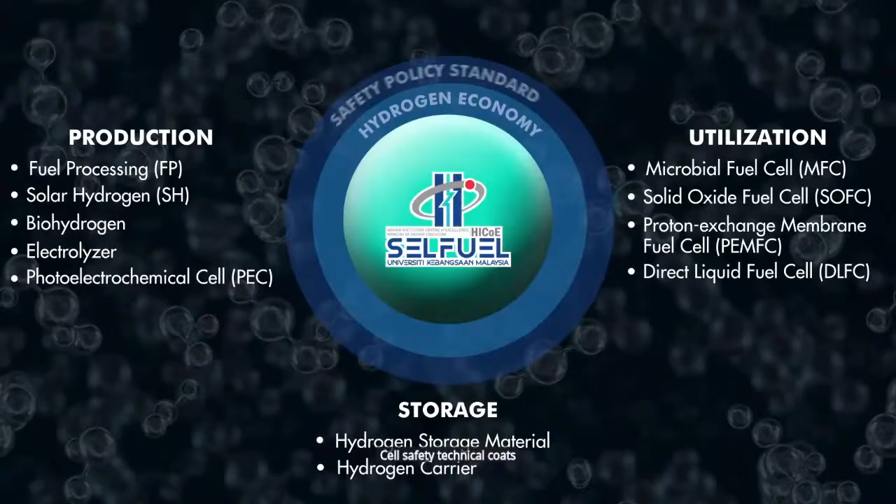Driving innovation and pushing the boundaries of fuel cell and hydrogen technology. Groundbreaking collaborations with esteemed industry partners. Obtain more than 50 million ringgit in research grants.

Our institute proudly offers three programs: research-oriented Master of Science, Doctoral of Philosophy programs, Master of Science in Low Carbon and Hydrogen Technology, and Micro-Credential. Our alumni are a diverse group of individuals who cover the globe, leading education, reshaping industry landscape toward a model of self-leadership, creativity, and innovation.

As a leading institution in fuel cell and hydrogen research, we have forged strong collaborations with top-tier universities across the globe. Through these collaborations, our students and researchers gain valuable international exposure, enhancing their academic and professional growth while contributing to the global scientific community. Join us at SELFUEL and embark on a transformative educational journey that will empower you to excel and make a lasting impact on our sustainable world.

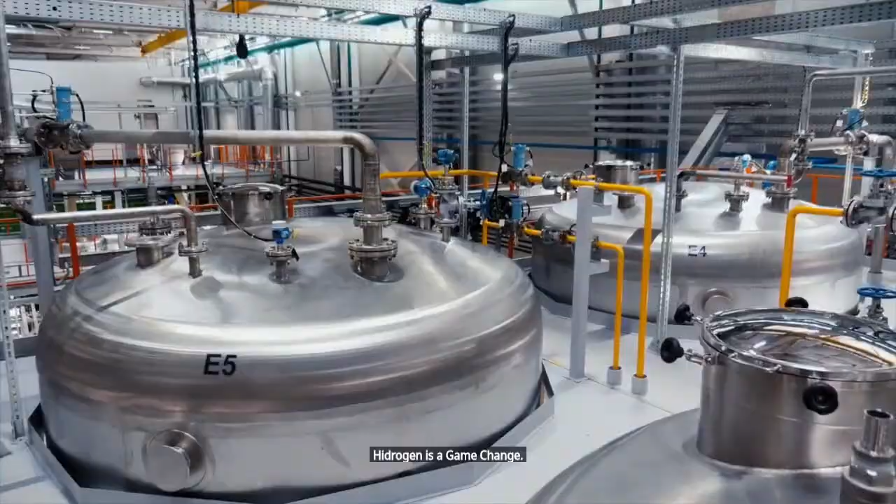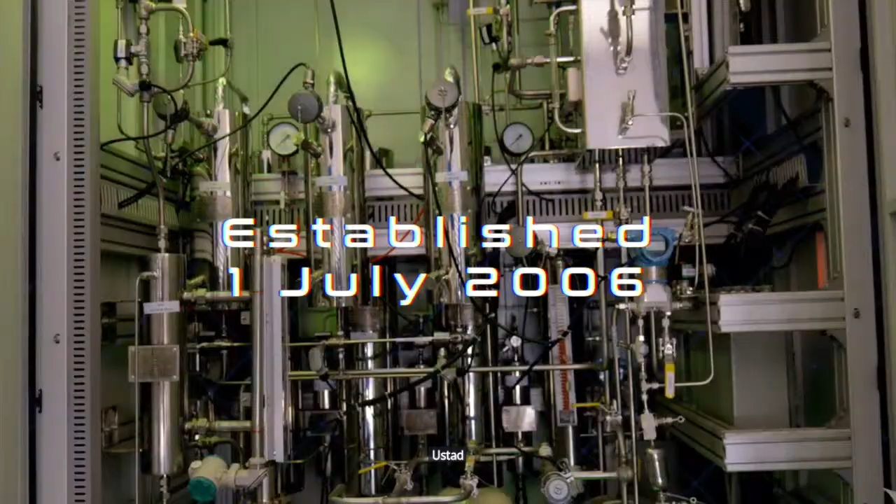But how? Hydrogen is a game changer. And at the forefront of Malaysia's hydrogen revolution stands the Fuel Cell Institute of Universiti Kebangsaan Malaysia. The Fuel Cell Institute, also known as SELFUEL, is a premier national research centre at UKM. Established on July 1st, 2006, our goal is to become a centre of excellence for fuel cell and hydrogen technology around the world.

Consistent with government goals of expanding opportunities for clean energy sources, the shift from a carbon economy to a hydrogen economy holds the key to a brighter, cleaner future for all.

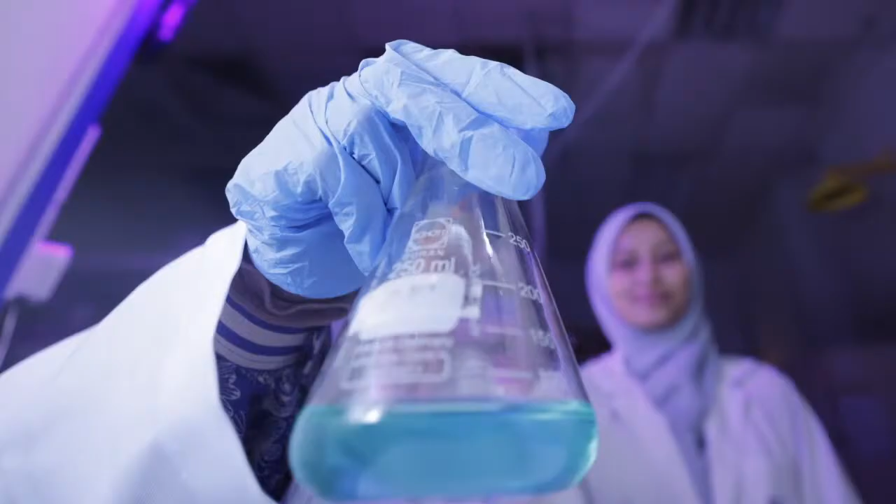At SELFUEL, our research covers the entire hydrogen economy value chain. We delve into diverse areas ranging from hydrogen production, utilizing solar and renewable electricity, sustainable hydrocarbon thermal chemical processes, and biological hydrogen production through fermentation and microbial electrolysis cells.

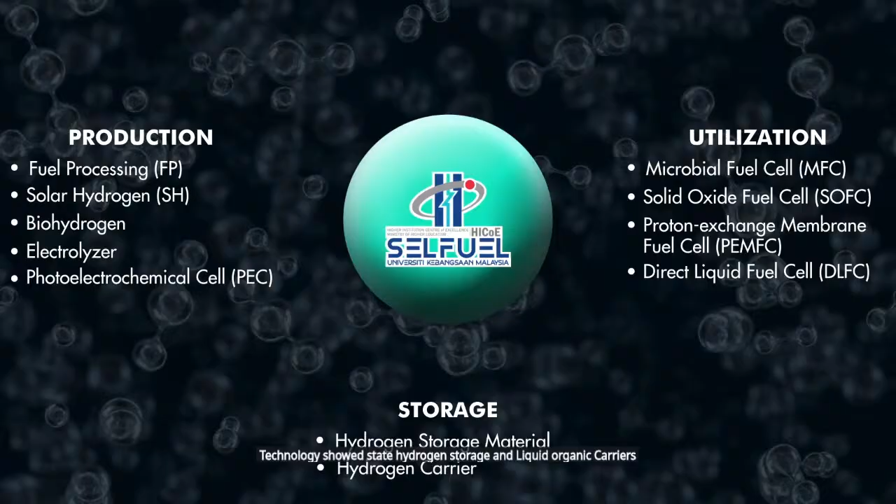Our research also encompasses the utilization of hydrogen in various fuel cell types, including proton exchange membrane fuel cells, solid oxide fuel cells, direct liquid fuel cells, and microbial fuel cells. We explore advanced technologies in solid-state hydrogen storage and liquid organic hydrogen carriers. Safety considerations and the development of hydrogen and fuel cell safety technical codes are also integral parts of our work.

Driving innovation and pushing the boundaries of fuel cell and hydrogen technology. Groundbreaking collaborations with esteemed industry partners. Obtain more than 50 million ringgit in research grants.

Our institute proudly offers three programs: research-oriented Master of Science, Doctoral of Philosophy programs, Master of Science in Low Carbon and Hydrogen Technology, and Micro-Credential. Our alumni are a diverse group of individuals who cover the globe, leading education, reshaping industry landscape toward a model of self-leadership, creativity, and innovation.

As a leading institution in fuel cell and hydrogen research, we have forged strong collaborations with top-tier universities across the globe. Through these collaborations, our students and researchers gain valuable international exposure, enhancing their academic and professional growth while contributing to the global scientific community.

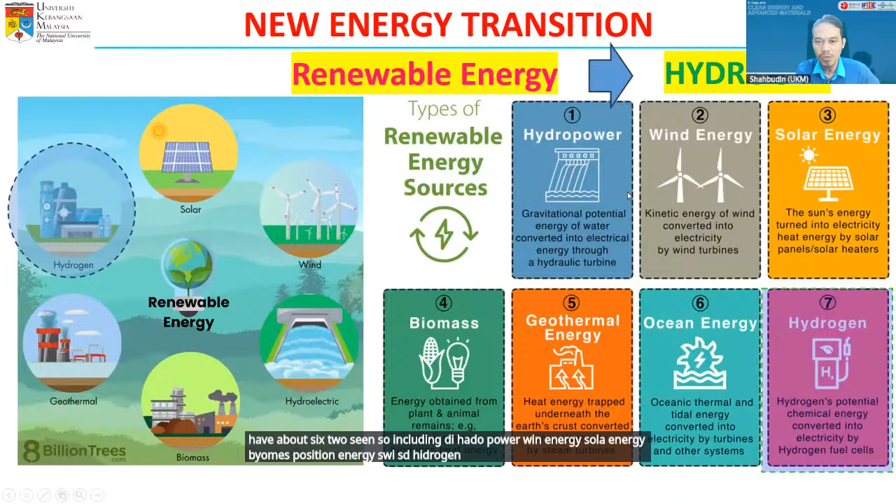So basically in renewable energy, we have about 6 to 7 categories, including hydropower, wind energy, solar energy, biomass, geothermal, ocean energy, as well as hydrogen energy. Hydrogen is one of the renewable energy resources.

Then why hydrogen? When we look into the characteristics, there is a lot of excellence, including that hydrogen is the simplest element on Earth, and the abundance is very huge, about 70% of the mass in the universe, and in terms of energy density it is quite high.

And when we apply hydrogen to energy, for example using the fuel cell as a power generation unit, we can have only water as a byproduct, and also thermal energy. So this is the benefit of hydrogen for energy.

For example, it can have quick refueling times, environmental benefits, long-term vehicle operating cost benefits, and also economic benefits, and the efficiency will be high compared to the internal combustion engine.

And when we look into the applications, hydrogen has potential in terms of energy, infrastructure, storage, and resilience. And when you see the applications, we can apply it into transportation and also industrial uses.

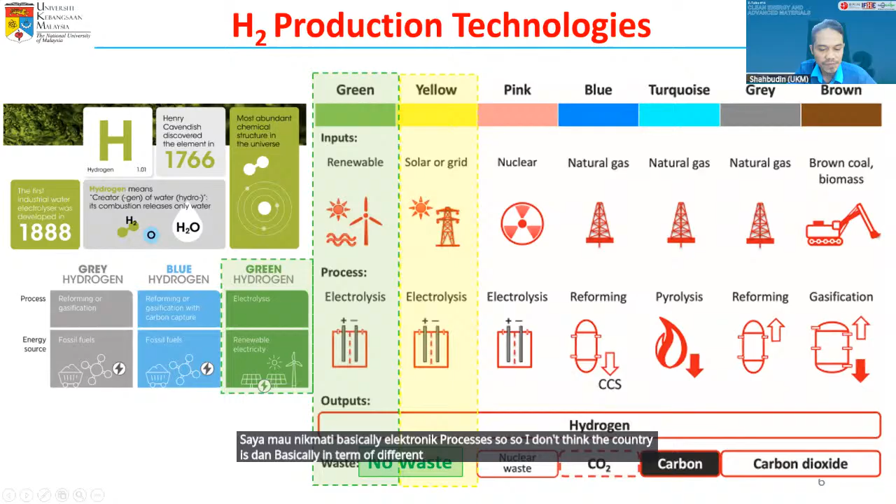But looking at these colors, basically we can say that if we consider green hydrogen production, in terms of waste there will be no waste, and in terms of technology it refers towards electrolysis processes. So whether the color code is yellow or green, in terms of environment it is very environmentally friendly because there is no waste.

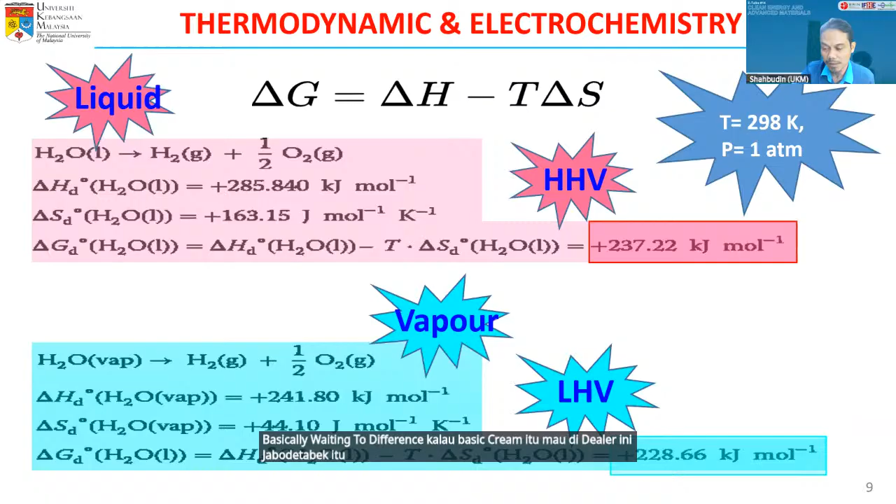While in vapor phase, this is referring to solid oxide fuel cells. The energy value here is 228 kilojoules per mole, which is referring to the low heating value.

In terms of performance, we are referring to the polarization curve. This is an indicator to know the performance of the electrolyzer. By looking at this polarization curve, we can know exactly, or roughly, what is the efficiency for each electrolyzer unit.

For example, if we look at the HHV, high heating value, the power to produce 1 kilogram of hydrogen is about 39.4 kilowatt hours. While referring to the low heating value, the amount of energy required to produce 1 kilogram of hydrogen is about 33.3 kilowatt hours.

This is basically referring to the amount of voltage for a single cell of the electrolyzer. For example, if we refer to the HHV, the voltage is about 1.48 volts for one cell, while for the LHV, the voltage would be about 1.23 volts.

By referring to the thermodynamics, we can realize the correlation between the current and the hydrogen production. If we need high hydrogen production, we need to put in a very high current, and it will affect the design.

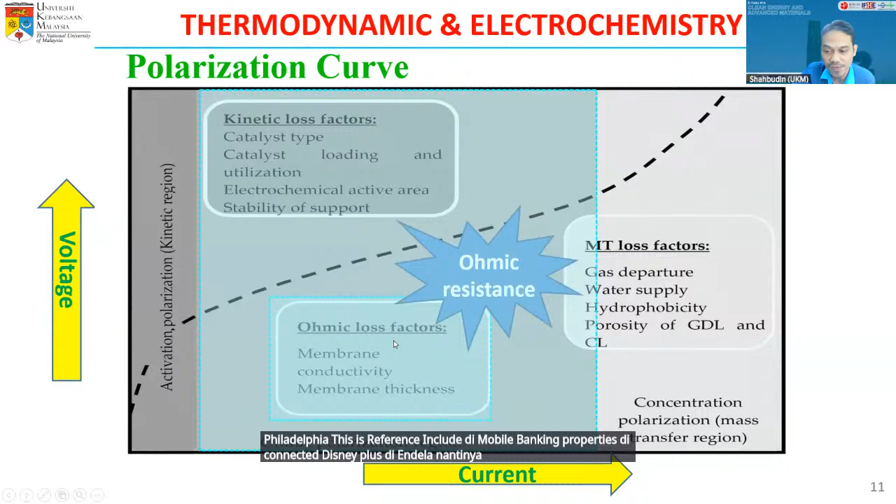We also have another type of loss referring to mass transport, including gas departure, water supply, hydrophobicity, and the porosity of the GDLs and catalyst layer. This is due to concentration polarization, because sometimes water cannot directly transfer to the electrode due to issues with gas bubble management at the anode side.

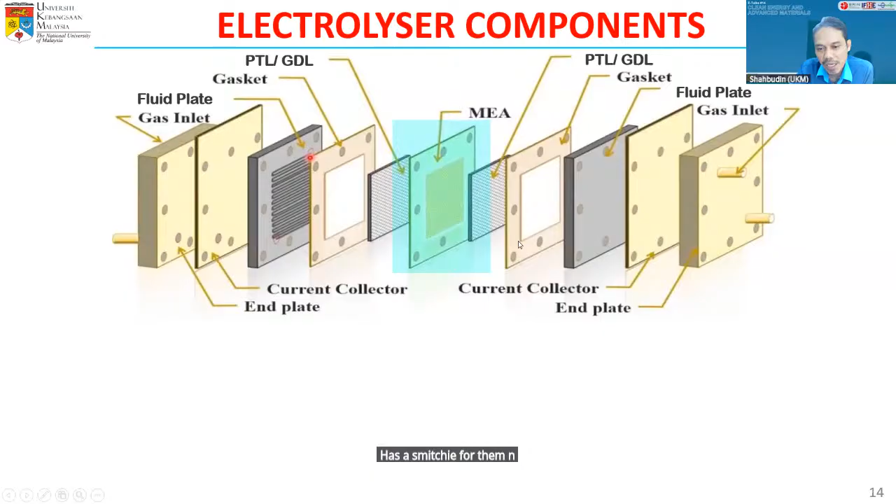This is the basic component for the electrolyzer. We have the fluid plate, for example referring to the bipolar plate. We have the gasket, the porous transport layer or gas diffusion layer, and the electrode, which we call the membrane electrode assembly. These components have a symmetry, for example the anode and cathode are similar components, and the MEA is the heart of the electrolyzer.

At the anode side, for the PEM type electrolyzer, we use iridium oxides. For the cathode side, we use platinum carbon, and for the membrane, the common material used is perfluorosulfonic acid, PFSA polymer membrane. This is the common material for the PEM electrolyzer.

Also, one of the important components we need to know is the bipolar plate, or the fluid distributor, which is the most important component and makes up more than 70% of the total weight.

The functions of this bipolar plate are to distribute the fluid, either in gas form, for example oxygen and hydrogen, and also the water, for example for the PEM electrolyzer. It also has a function to separate the cell, support the electrode, the MEA, and to facilitate the electrical distribution and thermal conductivity.

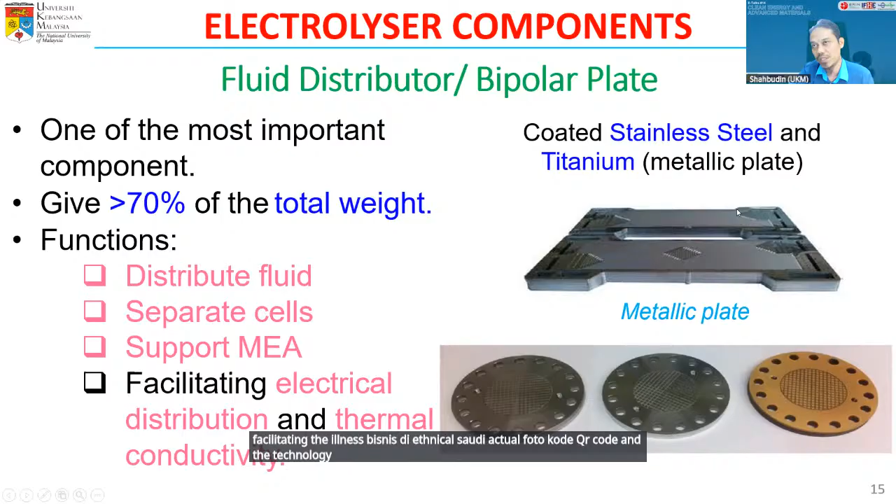This is an example of an actual photo for the coated stainless steel and titanium, which we refer to as the metallic plate for the electrolyzer.

The aim is to have a uniform gas distribution, good water transport, and good mass transfer. This is the goal when designing this bipolar plate.

In terms of the electrolyzer, we need to apply a high current. With high current, the tendency to corrode is very high. That's why the bipolar plate needs to be coated using a different material. The most common material used for the coating is platinum.

This is the target by the US DOE for the bipolar plate, in terms of the coating properties we need to have for the electrolyzer.

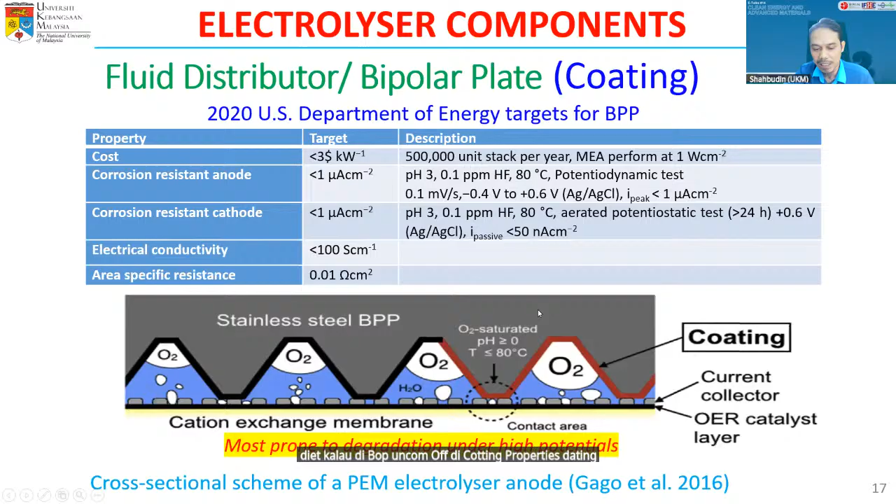After knowing the components, we can assemble the single cells, either referring to the alkaline electrolyzer or the PEM electrolyzer unit. After that, we can assemble all the cells, integrating them into complete stacks. We call it stacks for the multiple cells.

Then we move to the balance of plant. This is the system from NEL company, one of the hydrogen companies, for the electrolyzer system. For the balance of plant, or the system of the electrolyzer, this is a comparison between the alkaline and the PEM electrolyzer.

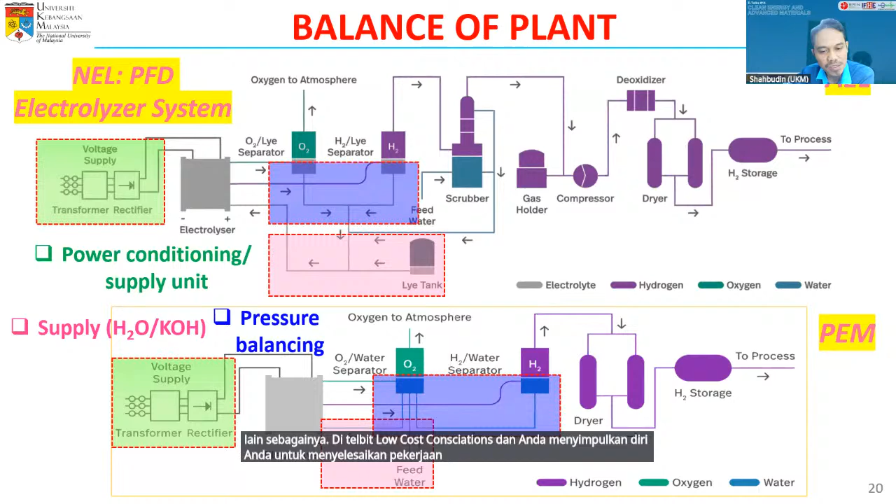We need to have the power conditioning, or the power supply unit, and then we need the reactant - in this case, DI water for the PEM electrolyzer and KOH for the alkaline, or even for the anion exchange membrane we have a lower concentration, for example 1 molar for the AEM. Then we need pressure balancing, because we need to properly manage the pressure at the anode and cathode side, since pressure builds up at the cathode side and we need to balance the system.

We also need to have the hydrogen cleanup system or subsystem. For example, for the alkaline part, some oxygen will penetrate the porous membrane, so there is some oxygen at the hydrogen side, and then before use we need the dryer. For the PEM electrolyzer, basically there is no oxygen permeated or transported from the anode to the cathode, so we can have hydrogen as a gas along with some small amount of water on the side.

And then of course, the last part is we should have the hydrogen storage.

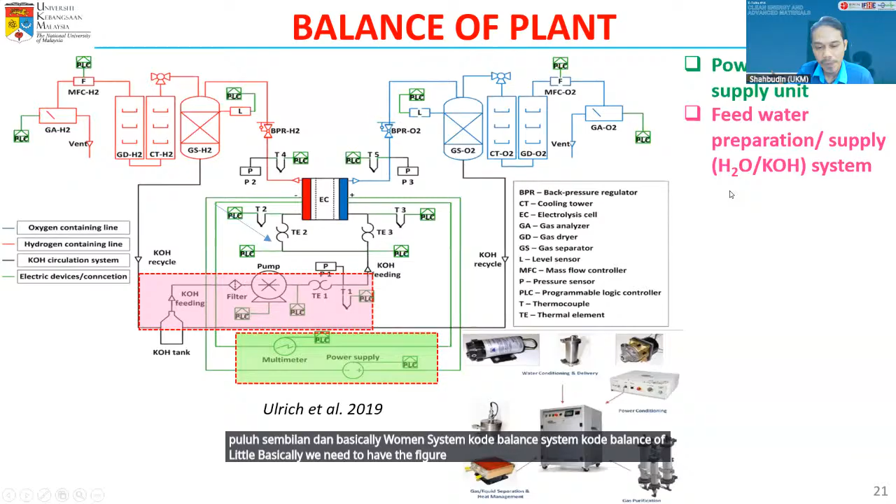When we look at the overall system for the balance of plant for the electrolyzer, we need the power conditioning, feed water preparation using pumps and so on, and the pressure balancing system as mentioned before. We also need the hydrogen cleanup system to remove water and oxygen, for example at the cathode side, plus hydrogen storage or buffer tank units. We also need the thermal management system, because when operating at very high temperature there is a requirement for cooling, using chillers or radiators. Finally, we need an overall control system to properly manage and link all the control systems for each subunit.

So this shows the importance of the BOP, and these are figures and actual photos for the Cummins products, previously known as Hydrogenics products.

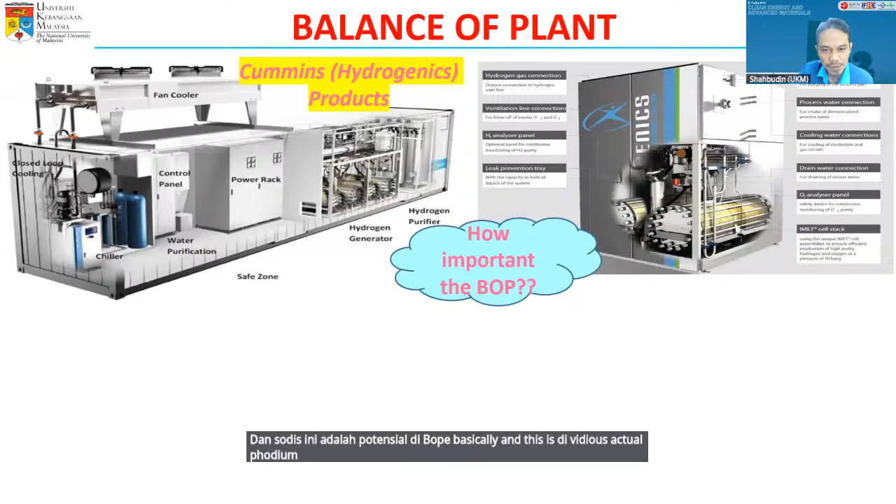This is again a comparison for the low temperature electrolyzers - the alkaline electrolyzer and the PEM electrolyzer. The important point is that based on the system, or based on the BOP, we can manage to have high purity, for example using a proper purification unit, so we can achieve very high purity hydrogen. For this case, the hydrogen can be purified up to nearly 99.998%. This shows the importance of the BOP.

If we don't properly manage or design the purification unit system, the purity can be affected. Also, in terms of operating conditions, for example how the system will be operated, we need to manage a proper configuration to make sure operations can run at, for example, 30 bar for the PEM electrolyzer, and for the alkaline, for example, 10 bar. This basically refers to how you manage or configure the system.

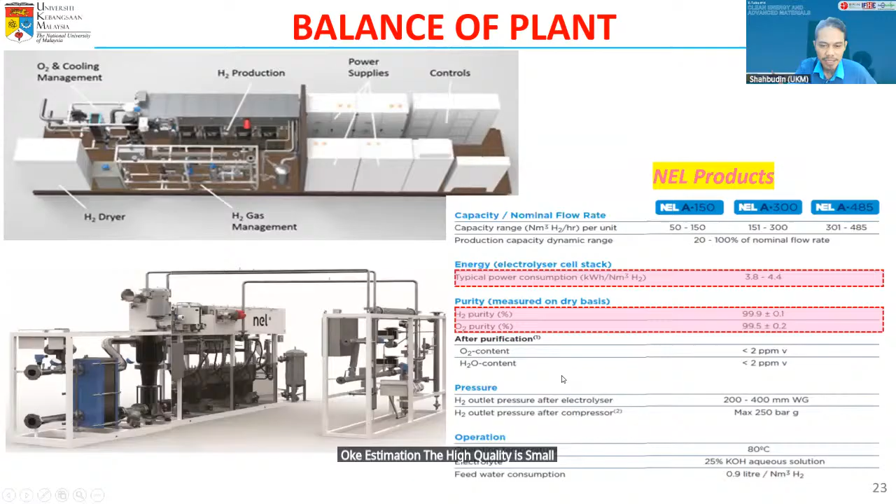As I mentioned, the purity is smaller than the previous one. And then this is the correlations. Once we have the materials, we have the designs for the stacks, and then we can integrate.

And this is the operating conditions, which will affect the performance. For example, the flow rates, the current supply, the energy supply that you need to provide, the solution concentration, for example the alkaline solutions. Basically for alkaline, about 30% concentration, while for the PEM electrolyzer, basically using DI water at certain conductivities. And of course, in terms of the operating pressure, the operating temperature, and also the energy input for the system.

And of course, it will give you indicators in terms of your outputs, for example the hydrogen flow rate. What is the hydrogen flow rate per energy input? And of course, the hydrogen purity. As I mentioned before, this depends on the balance of plant, the systems, and the system efficiency. And the most important part is the production cost. This is currently what R&D is looking into, to reduce the material cost and the cost of the hydrogen.

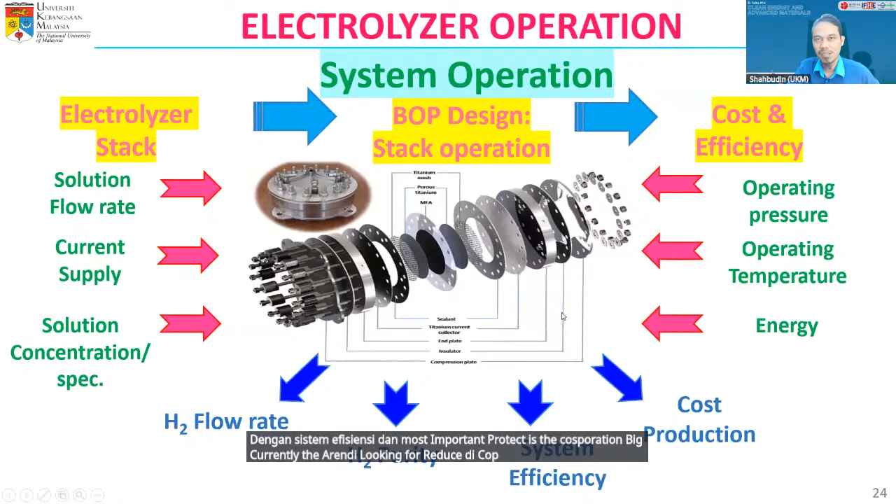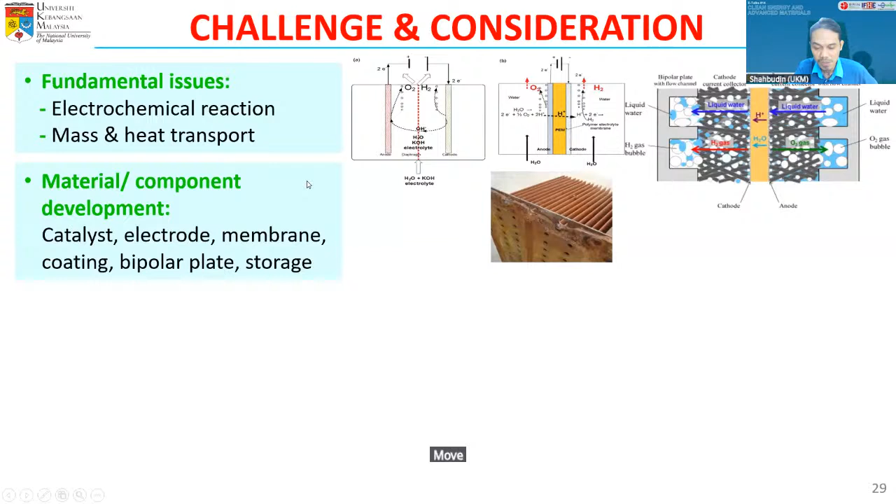And also the challenge in terms of materials and components development, including the catalyst, electrode, the electrolyte membrane, the coating, bipolar plate, as well as the hydrogen storage. And also the challenge in how you design the electrolyzer and the system, including the bipolar plate design, the sealing, the flange, the tie rod, and so on. And of course, at the end, how you design or develop the system.

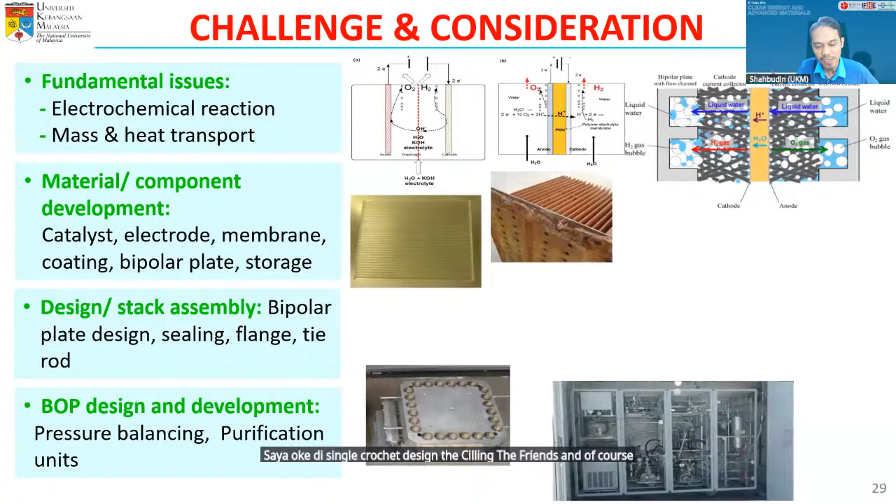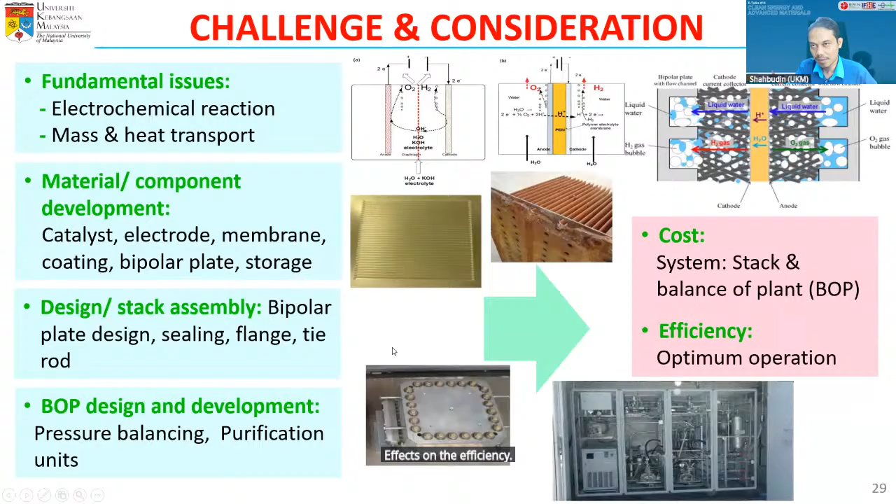And of course, this factor will directly affect the cost. For example, the material will definitely influence the cost, including the system stacks and balance of plant, and at the end it affects the efficiency and the cost of the hydrogen.

Okay, and in terms of the cost, this is the distribution in terms of the stacks and balance of plant. For example, 45% of the cost comes from the stack, including CCM.

Again, for the stacks, we have another distribution - for example, this is for the electrode catalyst coated membrane. And for the balance of plant, this is the category you need to know in terms of cost for the BOP, including the power supply, the deionised water circulation, the hydrogen processing, and cooling.

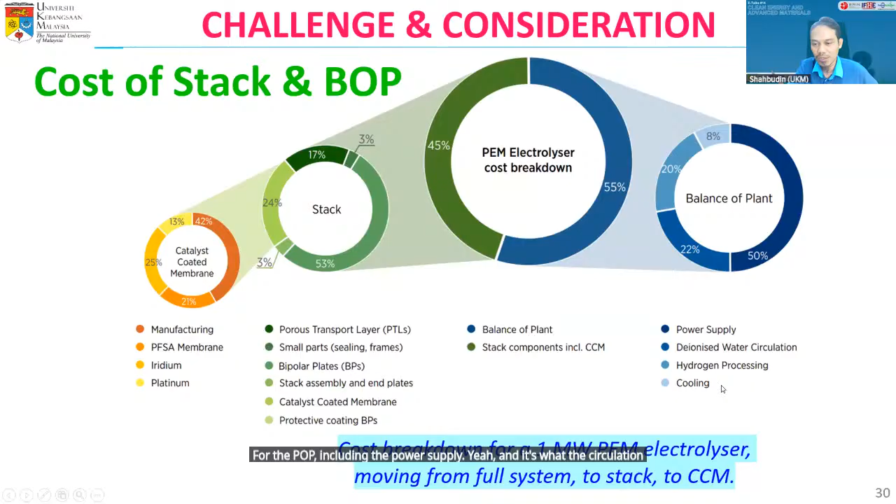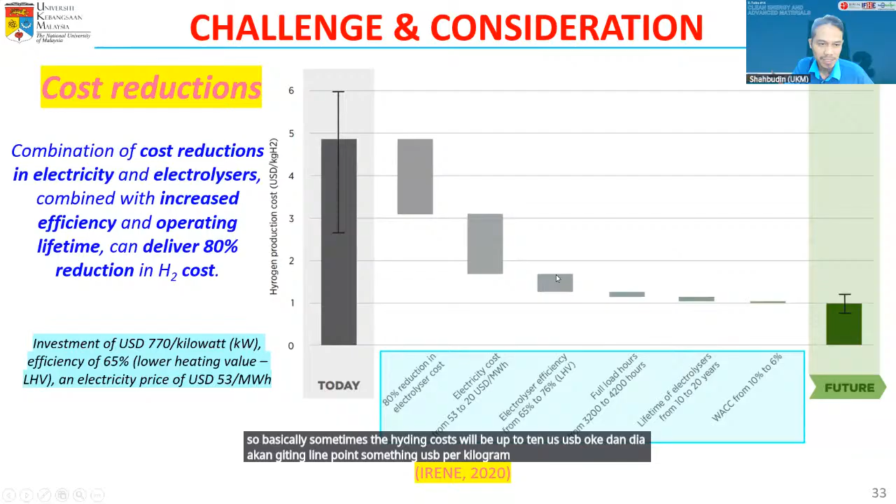And then this is the cost reductions and the sensitivity analysis in terms of the investment cost - investment cost to develop the electrolyzer. For example, if the cost reduces, then you can have the cost of the hydrogen be low.

And this is another sensitivity analysis in terms of the electricity cost, because the cost basically comes from the energy use, the power consumption to operate the electrolyzer. If you have a very low energy price, then of course you can reduce the cost of the hydrogen per kilogram.

Okay, and this is another KPI for electrolyzer technology, basically in terms of the pressure, the efficiency, lifetimes, and the capital cost. So this is the comparison between different types of electrolyzer, for example.

For example, the PEM electrolyzer - currently the pressure is about 70 bar or less than 70 bar. In the future, we can have more than 70 bar, and it can reduce the cost for the compressor, for example. And in terms of efficiency, it will increase.

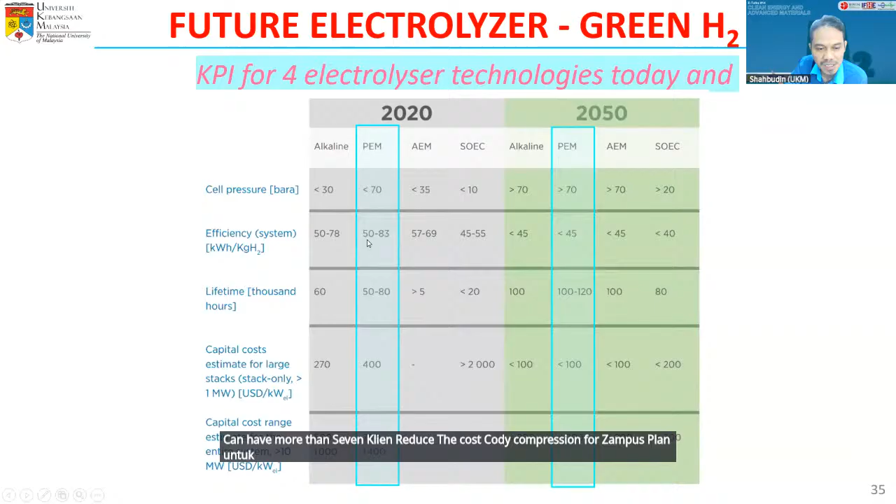This is based on the kilowatt hour per kilogram. It will reduce, and of course if you reduce the energy consumption, the efficiency will be increased. And of course, this is another capital cost reduction.

And this is another future KPI for electrolyzer technology based on the PEM electrolyzer, and this is what R&D can focus on. For example, for the current density, we can focus on the designs and methods to develop the material for the membrane, for example.

The catalyst, and also this example for the system - basically, we can focus on the system configurations, for example, improvement of the balance of plant, and so on.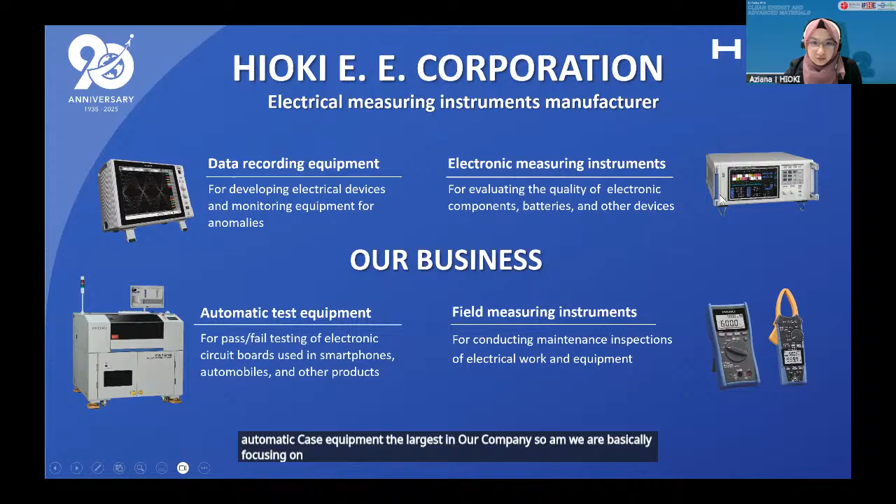Our business domain is to solve social issues through electrical measurement by visualizing the conversion of efficiency from electrical energy to various forms of energy. There are four types of energy conversion, for instance from electrical energy to various forms of energy, and from various energy to electrical energy. HIOKI provides services and products to accommodate this technology so we can visualize them.

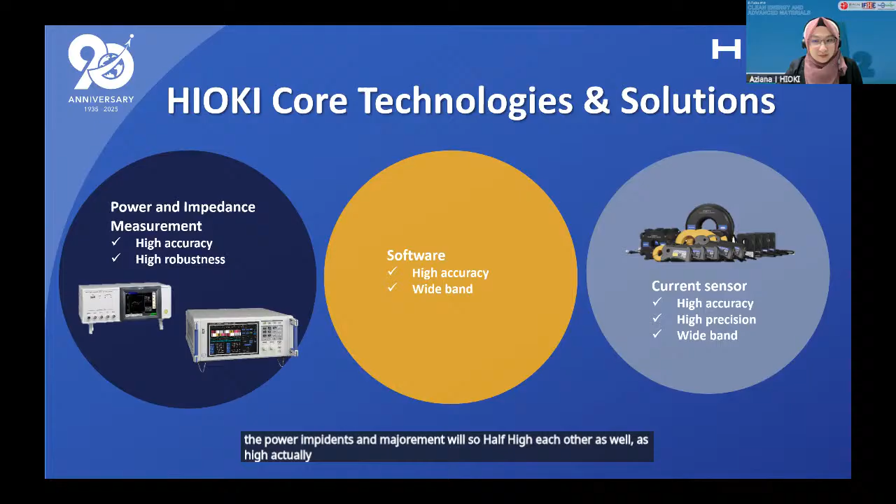The HIOKI core technology is based on several parts. One is power and impedance measurement. We also have high accuracy wideband software, as well as high accuracy, high precision wideband, high current sensors.

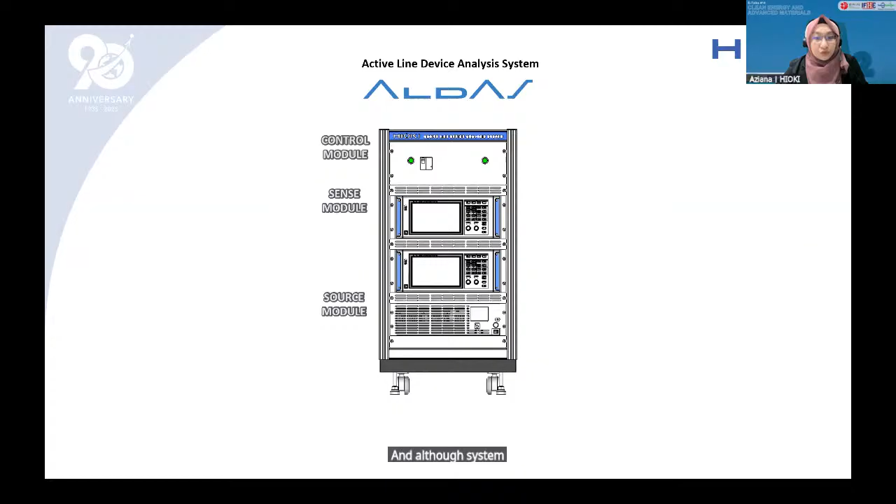With these core technologies that we have in HIOKI, we created a system called ALDAS, specifically for impedance measurement systems for electrolysis cells and fuel cells. ALDAS stands for Active Line Device Analysis System. An ALDAS system consists of 3 modules: source module, sense module, and control module.

Let's take a water electrolysis cell as an example. When we operate the water electrolysis cell, we have a DC power supply, and an electrolysis cell that is producing hydrogen. The line we call the active line is the line where electricity flows.

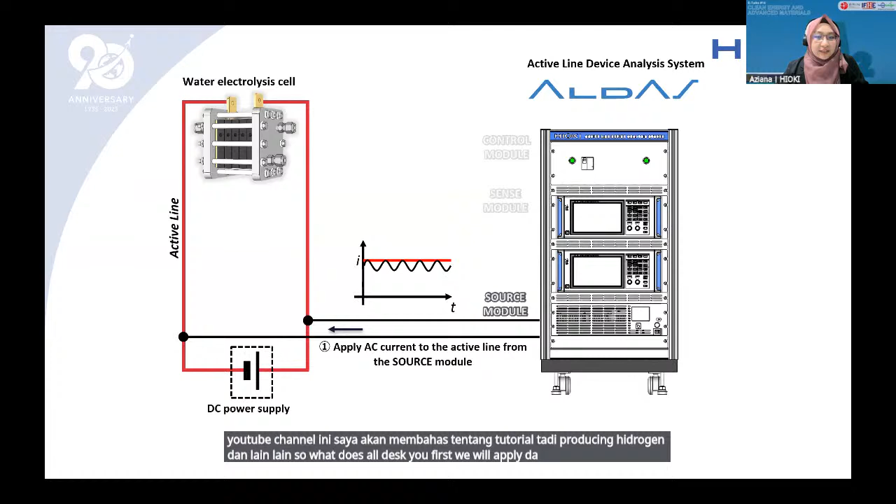So what does ALDAS do? First, we apply alternating current to the active line from the source module. Then we measure the current and voltage using our current sensor and voltage sensor. Then, from our control module, we use our integrated analysis software to plot an impedance graph.

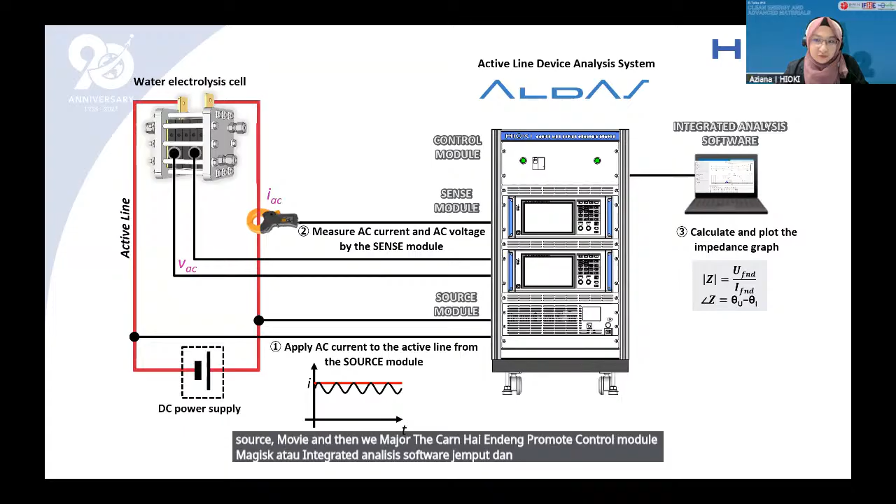It has high energy density and is abundant. It's available in various forms, not just water but also hydrocarbons. It's also versatile, used not just as a fuel but as a feedstock to produce ammonia and methanol, and so forth. What's special about hydrogen is that it is clean at the point of use, with no greenhouse gas emission, and the byproduct is just water.

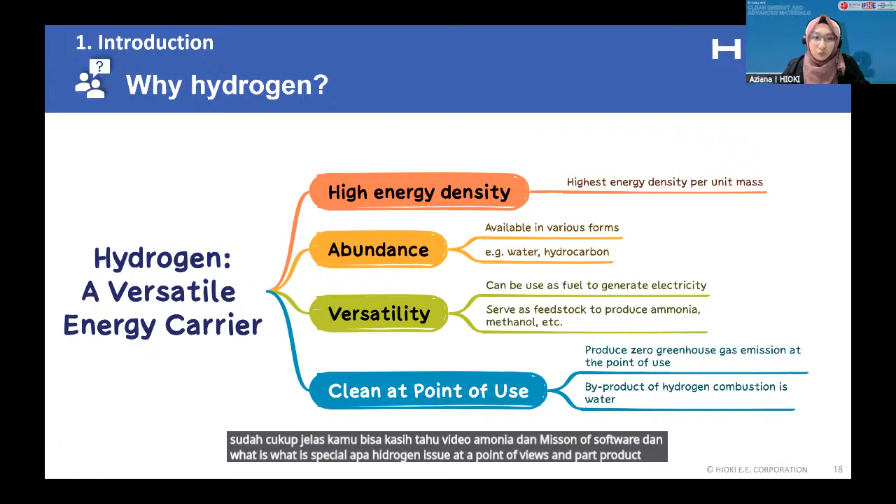For the sustainable pathway, first we start with a water electrolysis cell, which requires water and an electricity source. If it's from renewable energy, it's called green; if from other sources, it has a different color. From the water electrolysis cell, we produce hydrogen. We can use this hydrogen for electrolytic synthesis with toluene, carbon dioxide, or nitrogen to produce things like MCH as a carrier, e-methane as a synthetic fuel, and ammonia, which can be used in various parts of the system.

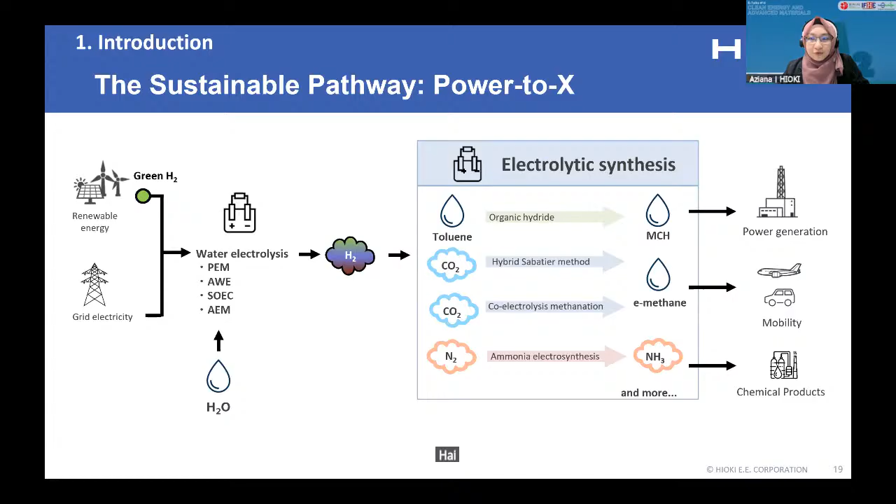This is called the power-to-X concept, where electricity conversion, energy storage, and conversion pathways use the surplus of renewable energy. This technology also allows decoupling of power from the electricity sector, making it independent on its own, so it can be done in very secluded areas if you can produce it on the spot.

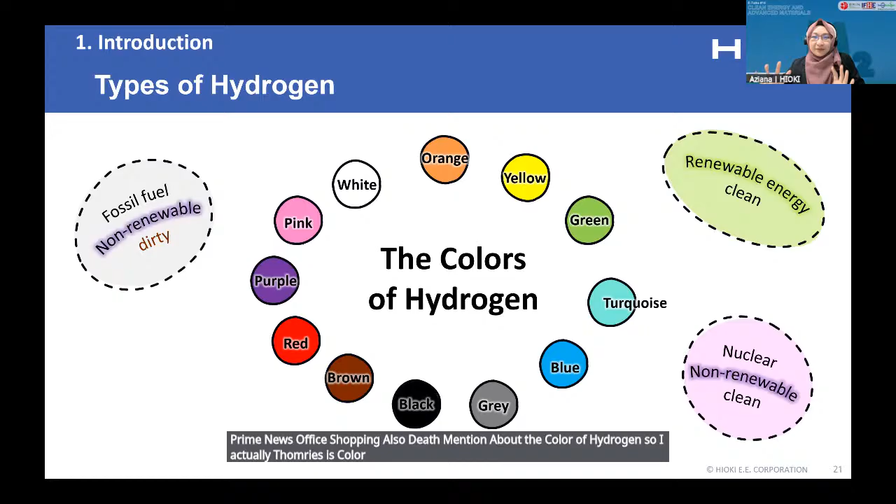Prof. Shahbuddin also mentioned the color of hydrogen. I summarized the colors of hydrogen in this graphic. We have renewable energy for green hydrogen, and also pink and purple for nuclear, and black, brown, gray for fossil fuel, non-renewable resources, categorized as dirty colors, versus clean renewable and clean green energy.

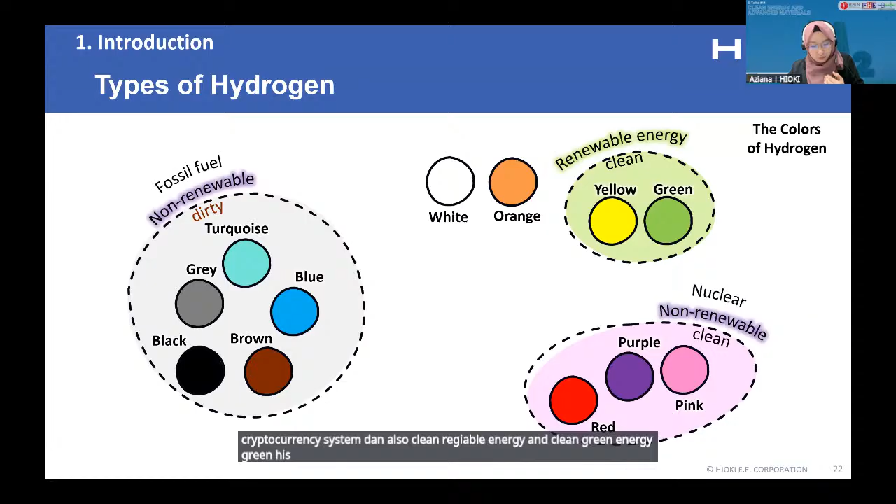Green hydrogen is basically our target, so the emphasis of the whole hydrogen pathway is to be produced green, from renewable energy. These are just some of the processes that create different colors, but this is additional information. Next, we move to FC and EC. We have the hydrogen molecule from the introduction, and now we look at the equipment that uses this hydrogen.

So fuel cell and electrolysis cell are both used in hydrogen process. Fuel cell uses hydrogen for combustion by some spontaneous reaction that produces electricity, with water as byproduct. And electrolysis cell uses electricity to produce hydrogen.

As I've written here, there's a spontaneous reaction and non-spontaneous reaction. Electrolysis cell requires energy, which is the electricity, to drive and break the bond of the water molecules into hydrogen and oxygen. So we can say that these processes are like two sides of the same coin. It's interchangeable, and it's very important in terms of hydrogen technology.

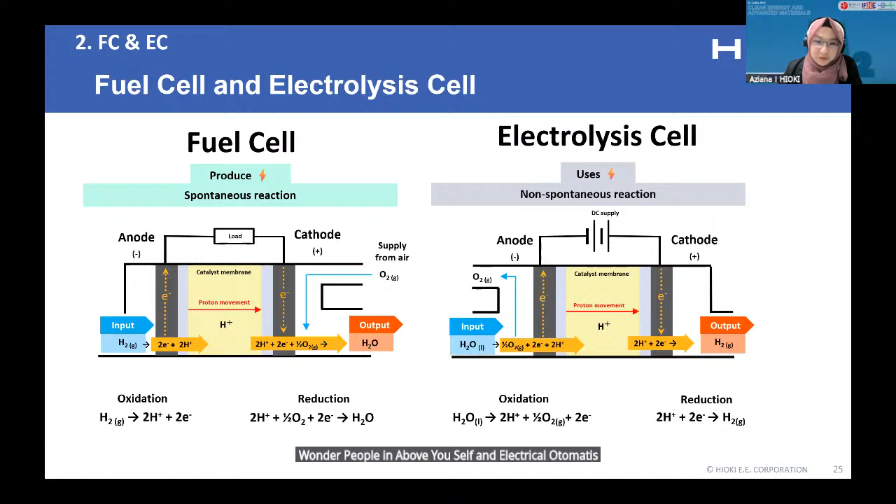This has already been covered by the previous presenter, so I will not cover this part, but I would like to briefly introduce the types of fuel cells and electrolysis cells. They do have something in common in terms of types, for example proton exchange membrane, where H+ is the proton. They use this technology also for fuel cell, not just electrolysis, and also for solid oxide.

Solid oxide is quite special. It is reversible - you can use it as a fuel cell or as an electrolysis cell. It's just that the operating temperature is very high. The water is in the form of steam, and like in PEM type, they use catalysts to assist in breaking the bond, of course with electricity. But in solid oxide, you just use ceramic, and the kinetic energy from the temperature of the steam will break this very strong hydrogen-oxygen bond of water.

I think more of the details were covered previously, so I will not talk in detail, but this is very interesting because our measurement technology also covers almost all of these cells.

Now, let's go to the measurement technology. Hioki is an electrical measuring instrument company, so let's learn about measurement technology. In this part, I separated it into 4: first is the IV graph, impedance, electrical circuit element, and the fourth is overcoming the limitation of IV graph.

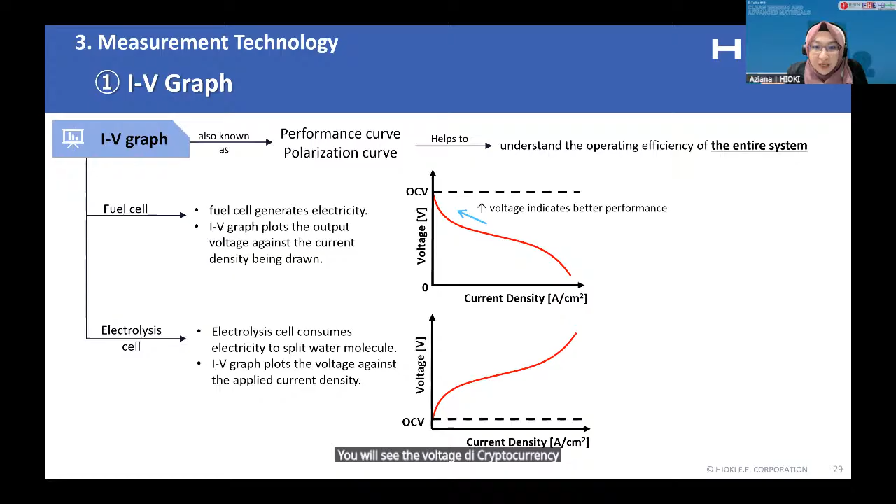They are the opposite of each other, a mirror of each other. For fuel cell, in the beginning from OCV, you will see the voltage decreases. OCV is the maximum for the fuel cell, and it's the minimum for electrolysis cell - the opposite.

At the first part, high voltage indicates better performance. As the current density increases, the voltage will be reduced as more current is being drawn. On the other hand, for electrolysis cell, as the current density increases, the voltage increases because there is a variety of losses that occur in the cell that require the voltage to overcome this resistance and produce more current.

Okay, let's take this fuel cell and electrolysis cell. Generally, this true IV graph is separated into 3 areas. First is the activation loss in fuel cell, or activation over potential - the term used in electrolysis cell is over potential, the term used in fuel cell is loss. So it's activation, ohmic, and concentration loss - these 3 different parts.

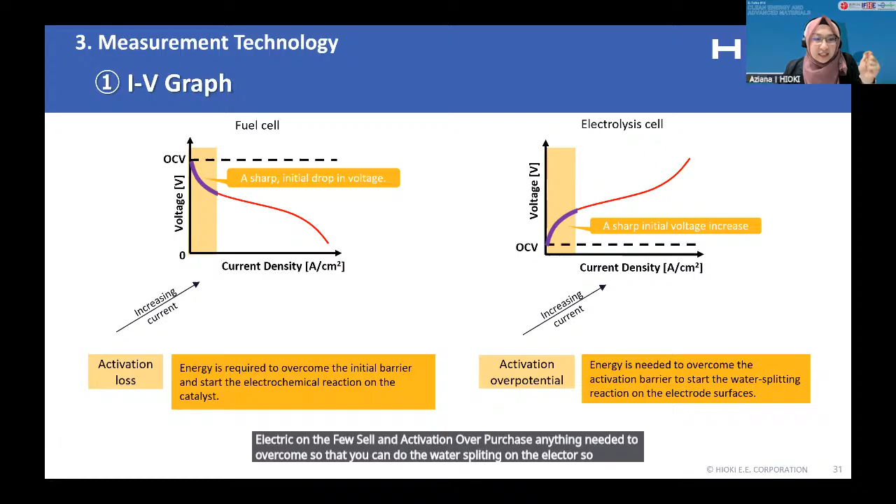First, let's look at the lowest current density, which is activation loss. This activation loss is the energy required to overcome the initial barrier and start the electrochemical reaction of catalyst on the fuel cell, and activation over potential is the energy needed to overcome so that you can do the water splitting on the electrode surface. From the graph, you can see there's an initial drop, and for electrolysis cell, an initial increase.

The next part will be the ohmic loss or ohmic overpotential. Why is it called ohmic? Because it shows similar behavior as Ohm's law - the linear, almost linear voltage relationship on both sides.

And then the last is the concentration loss. Concentration loss occurs in the high current density area where the system for the fuel cell cannot supply hydrogen and oxygen fast enough to meet the demand for the high current. For the electrolysis cell, there is a buildup of gases from this splitting reaction on the electrode surface that blocks the active site, making it harder for the reaction to proceed, hence increasing resistance as well.

So there are a few limitations from the IV graph that we cannot identify. First, we cannot separate the different voltage losses that occurred in the cell, because it shows the combination of all voltage losses, and it cannot quantify what voltage, how much loss, and what process a specific loss is. Also, from this graph we cannot learn about degradation performance, because as the cell ages, the IV graph will look worse, but it does not show what part of the cell is degrading.

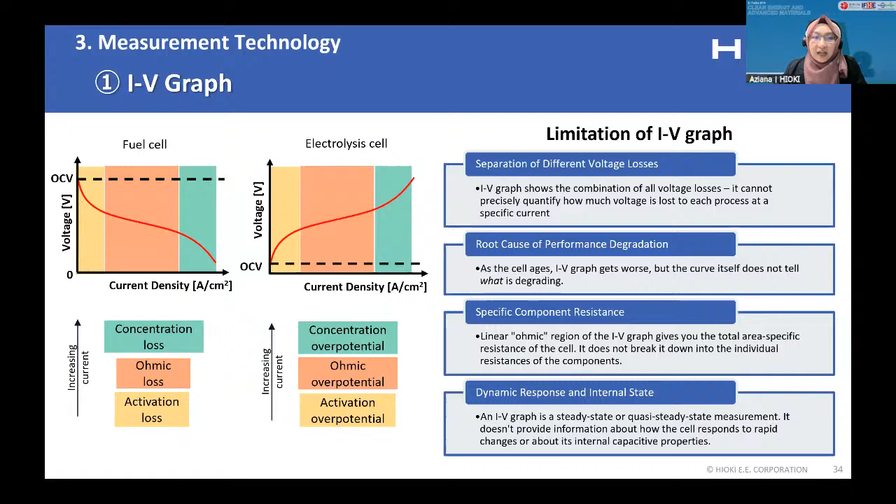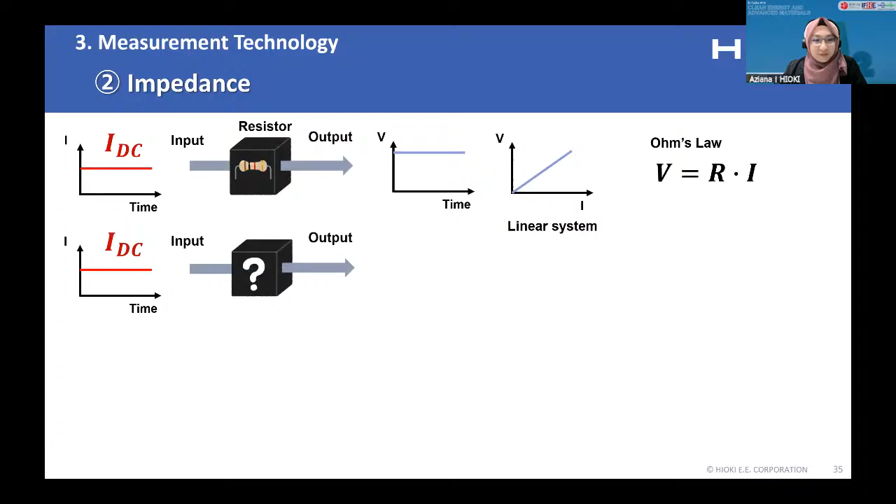Now we have another system. We input the same DC current and we have this result - it is a nonlinear system. How can we identify this particular black box? We use AC current, and then we get the information output in terms of a sine wave. This is what we call impedance, which is a quantitative measure of a circuit's overall opposition, not just for resistive, but also inductive and capacitive components.

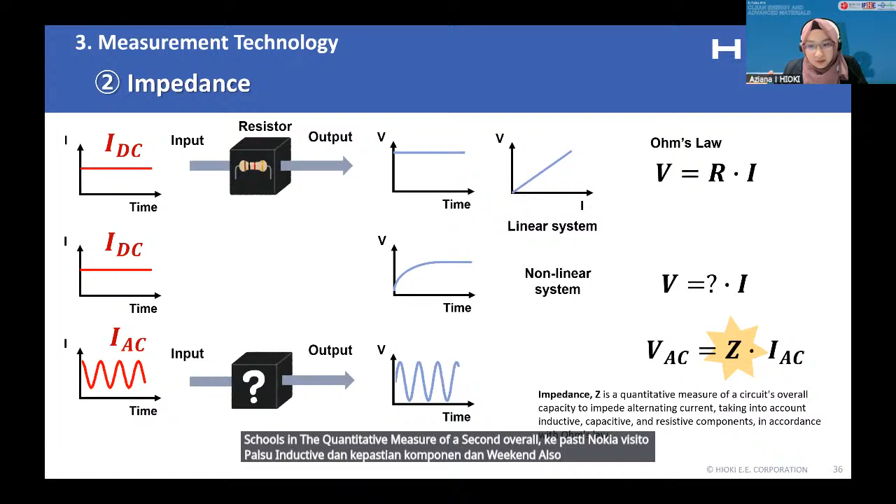And we can also express it in accordance with Ohm's law. So let's take this time domain measurement, where we measure the current and voltage. Next, we transform it into the complex domain, and these are the vector representations of the impedance as a complex number. From this complex form, from each measurement at each frequency, we can plot it.

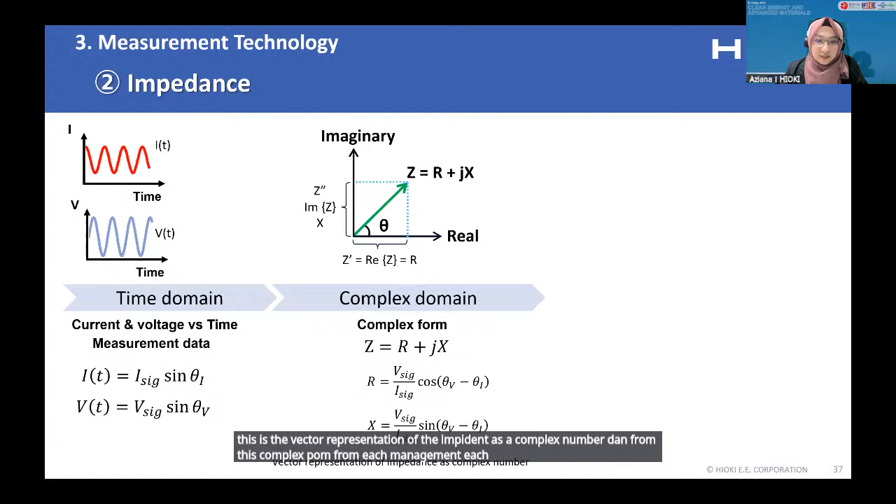Now, the impedance - generally we have this time domain that looks like Ohm's law, and then we transform to the complex domain, where we have real parts and imaginary parts. In chemistry, they probably use Z prime and Z double prime, but from an electrical background we like to use R and X. X is the imaginary part, and it's basically referring to the same thing. On the right side, you can see the imaginary axis and real axis. We have a point, and the magnitude of the impedance is determined, and we can also get the phase from this information as well.

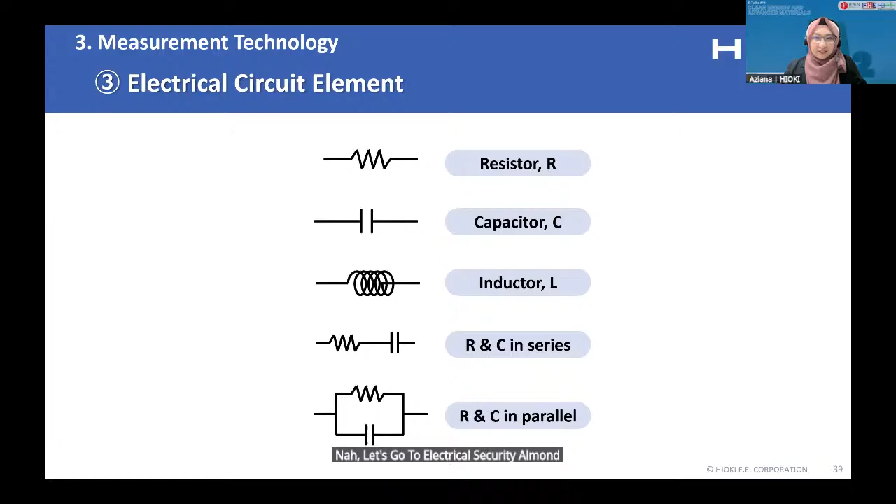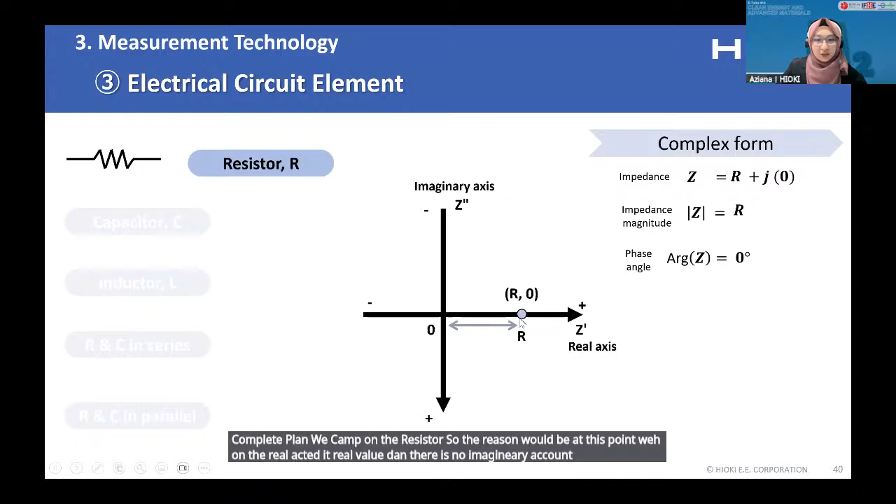Now let's go to electrical circuit elements - let's go back to basics. First, the resistor element. On the same complex plane, we can plot the resistor. The resistor will be at this point where on the real axis it's a real value, and there's no imaginary component, it's zero. So we know that R is located at that coordinate.

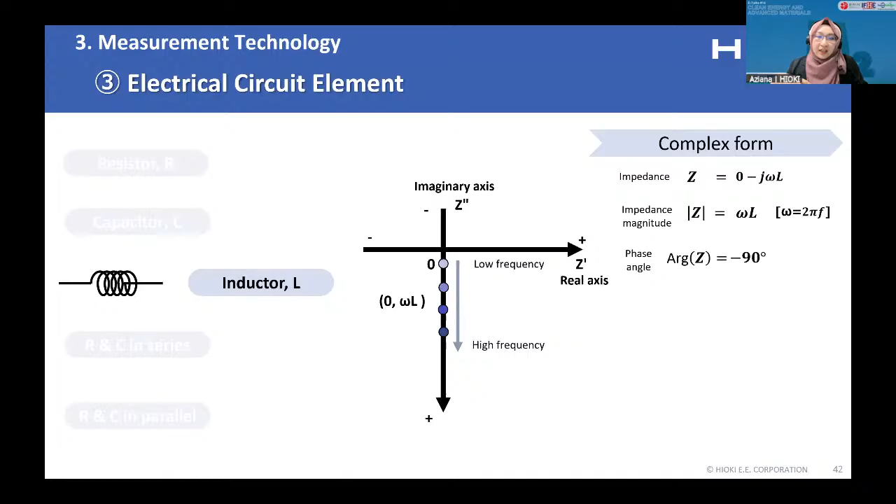Conversely, for inductor, at low frequency, it acts like a short circuit, like a short wire. That's why the impedance is close to zero. But at high frequency, it stores energy and the impedance gets higher, and that's where the resistance gets higher as well.

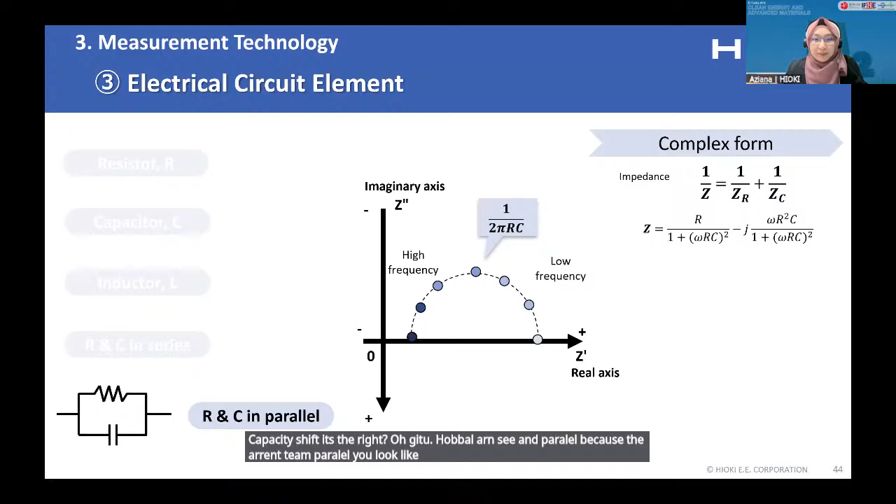How about R and C in parallel? Because the R and C in parallel, it will look like this, like a semicircle. Let's just learn about this semicircle.

First, we will have a high frequency. At high frequency, the capacitance value will be a short circuit. This means we have the value of R, and then in the middle, it will be a combination of R and C. Then at the low frequency, the capacitance will have higher impedance, so the pathway of current will be through the resistor.

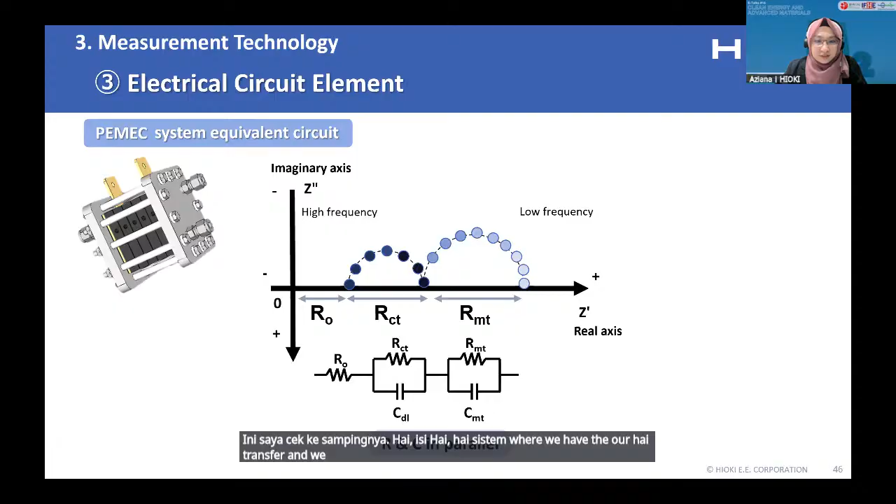I take an example for a PEM type of EC system where we have the charge transfer resistance and resistance for mass transfer. With this representation, I will explain how the graph and this value relate.

So the first is the ohmic resistance. Ohmic resistance is the resistance of the membrane due to the proton conductivity of the membrane. Then we have charge transfer resistance of the catalyst layer, double layer capacitance, resistance due to mass transfer, and also the mass transfer capacitance value, which can be identified from the plot we see just now.

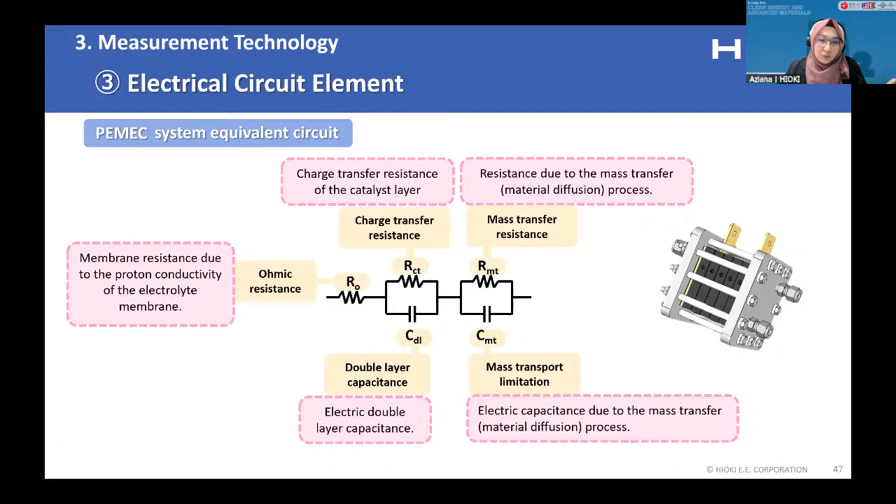So we have another term, called electrochemical impedance spectroscopy. Why is it called that? Impedance is a very general term, it exists in a lot of systems. EIS, electrochemical impedance spectroscopy, relates to chemistry - it is electrical properties of a chemical system with impedance.

Spectroscopy is because it's like a sweep on a range of frequency. It is an analytic technique we use to study this system, involving applying a small AC voltage or current to the system, and measuring the results in voltage or current response. By analyzing how this impedance varies with frequency, the EIS can provide very valuable information about different processes that occur within the cell.

For instance, the fast processes are captured at high frequency, like the ion flow through membrane, and the slow processes are captured at medium frequency, like electrochemical reaction at the catalyst, and very slow processes are captured at low frequency, like gas diffusion of molecules.

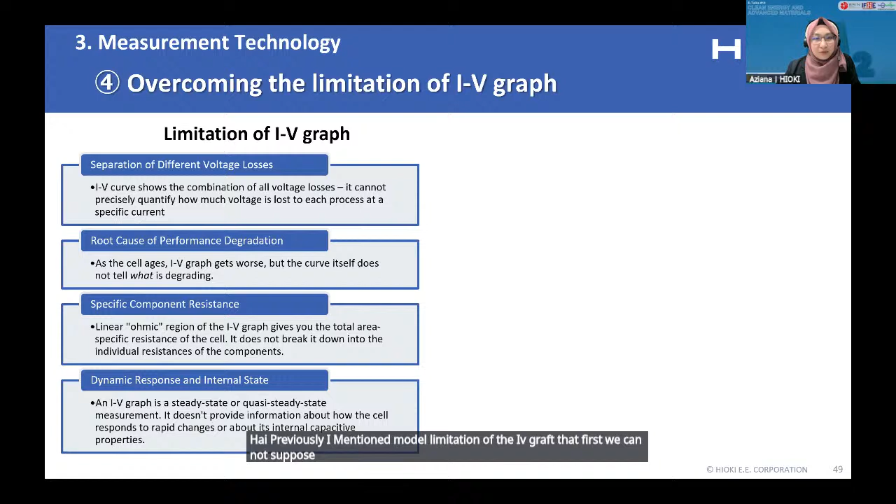Previously, I mentioned the limitation of the IV graph - first, that we cannot separate different voltage losses. As you see before, EIS can provide the separation of total resistance into distinct components like ohmic resistance, charge transfer resistance, as well as mass transport resistance.

Second, the root cause of performance degradation - the curve does not tell what degrades. By using this EIS impedance graph, we can do diagnostics by tracking how the EIS spectrum changes. An increase in charge transfer resistance will point to catalyst degradation, while an increase in ohmic resistance probably suggests a membrane issue.

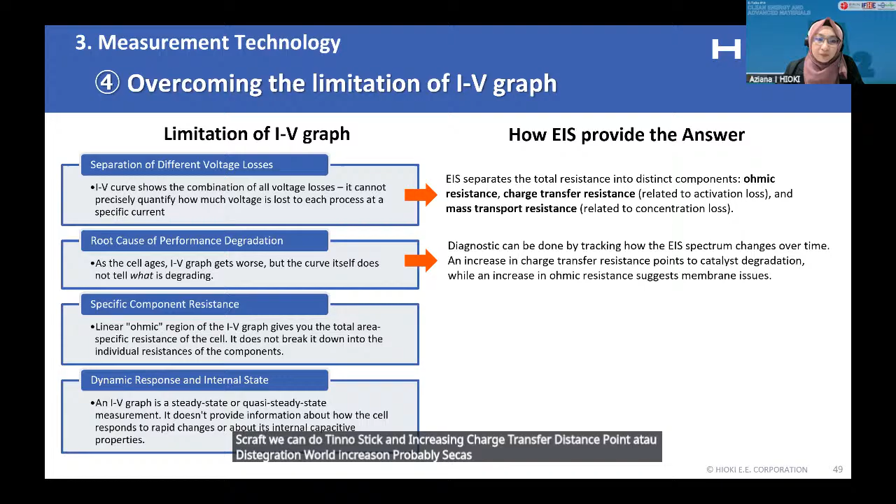Third is specific component resistance, where we can identify it. For example, EIS at high frequency, where the intercept is zero, gives a precise measurement that is purely ohmic resistance, isolated from the other processes.

The last one is the dynamic response. Since the IV graph is normally measured in a steady state, we cannot just know the dynamic response with an IV graph. But with EIS, the shape and size of the arc of the EIS plot can be used to diagnose the internal state, such as membrane hydration or electrode flooding.

So we can get more information with the impedance spectroscopy graph.

Let's look at an example case study. There are two types of case studies I'm going to present today. Both are related to PEM type electrolysis cell. First is operation at different current density, and the second is comparison with different catalyst loads.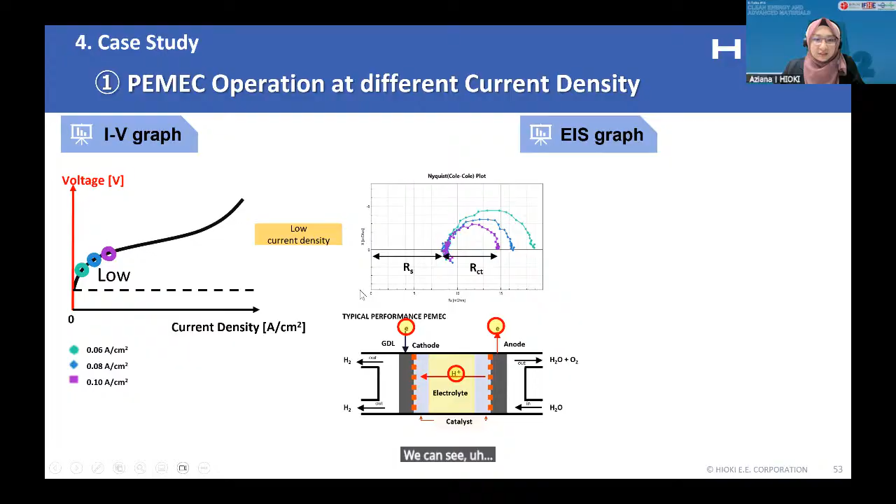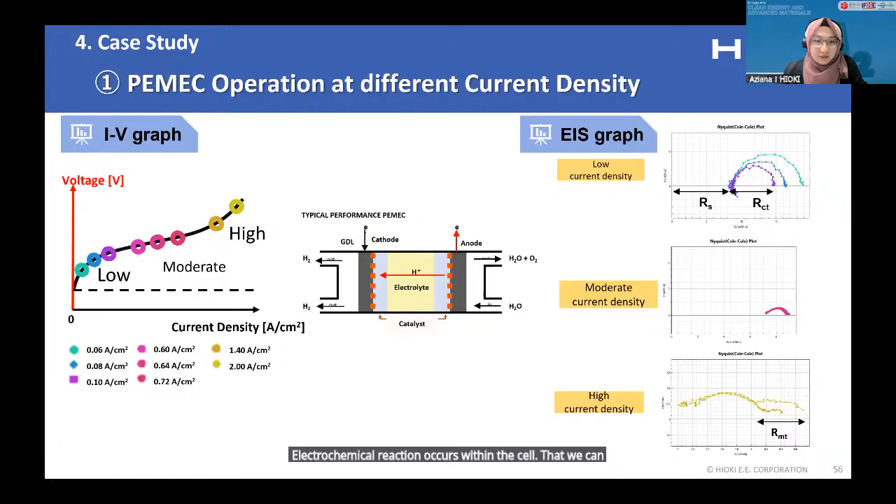This is shown together with the EIS graph and IV graph at low current density, represented by these 3 points. We can see this in the graph, and when we increase the current density to higher current density, it also corresponds to different parts of the electrochemical reaction occurring within the cell, which we can identify using this impedance graph.

Next is the comparison with different catalyst loads. We compare this using different values of the catalyst. For new, we represent it with iridium 2 milligram per centimeter square as a high catalyst load, meaning new. Used is with 1 milligram per centimeter square.

In this system, as the electrolyzer operates for many hours, the catalyst load decreases over time. So we represent the low catalyst load as the used one.

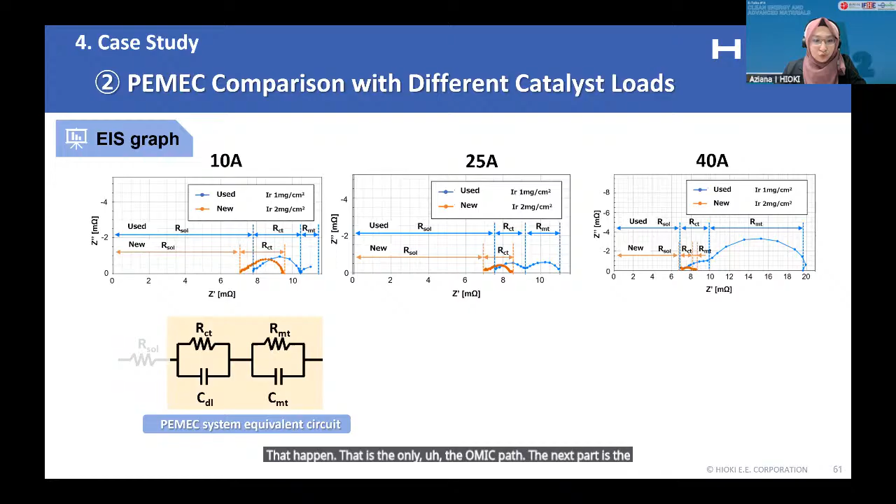When we look at 40 ampere, it seems like mass transfer diffusion is dominant - at higher current density, the mass transfer resistance is dominant. You can observe this from the EIS graph. So that will be the case study.

Next, I will talk about from data to decision. As a summary, what can we get from the impedance data? First, we can evaluate its performance because we know about the resistance, the charge transfer, mass transfer limitation, and we can also diagnose and troubleshoot the system.

We can identify and detect what degradation happened before it actually melts down or some accident happens - we can diagnose it beforehand. Third, on the research side, we can do optimization and design improvement. With this evaluation test, we can do better material selection and design better cell architecture.

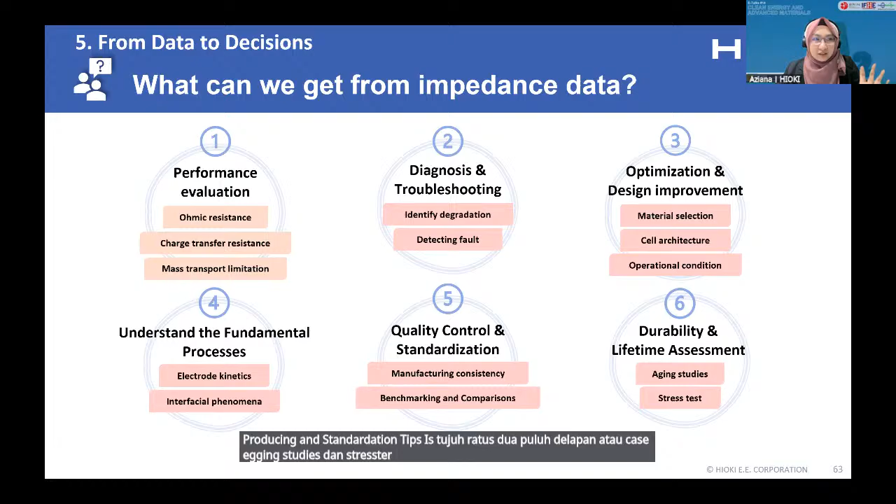Sixth is durability lifetime assessment, which is commonly done through aging studies and stress tests. After you design this membrane, you need to optimize it. For lifetime assessment, we use the same EIS data to compare each part of the flow for both the electrolyzer and the fuel cell.

So what are the possible risks without impedance measurement? There is a decrease in the performance of the fuel cell or electrolysis cell, reducing its efficiency and lifespan without us knowing about it, because of undetected degradation.

There's also the possibility of failure due to missed diagnostic opportunities. Of course, there's also limited information you can get from the system. There's limited R&D exploration, because exploration in R&D highly depends on how much data we can get from the system. High operational cost.

As it degrades, the resistance builds up and the voltage increases. Hence, you require more electricity, more power to be supplied to the system in order to get the same outcome. For example, the volume of hydrogen required will need more electricity, so it is high in operation cost.

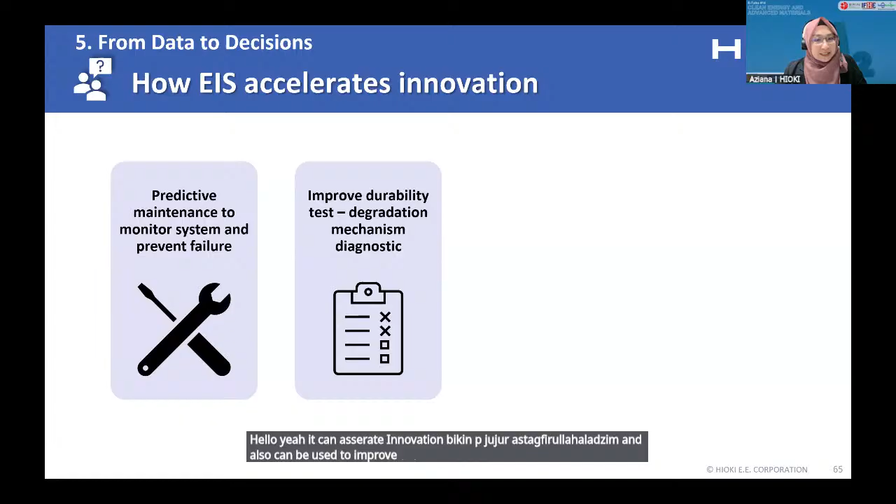Now, how can EIS accelerate innovation? It can be used together as predictive maintenance to monitor the system and prevent failure, and also can be used to improve durability tests and used as a diagnostic mechanism.

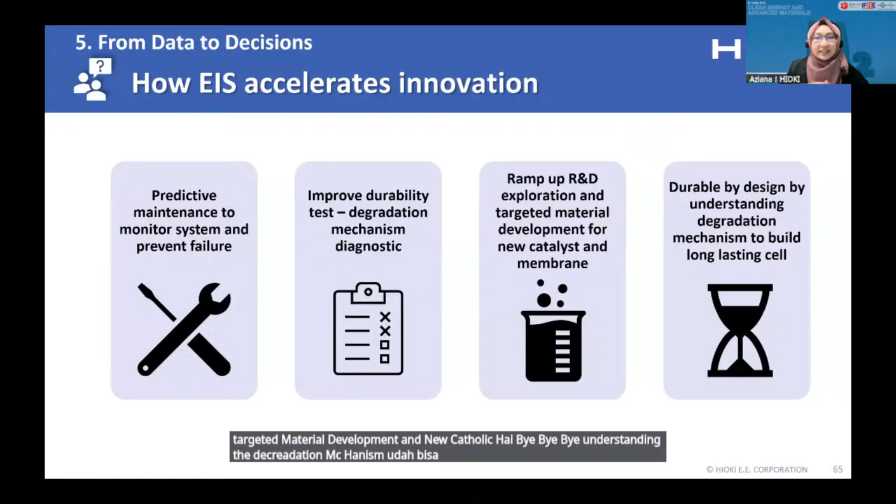With EIS, as I mentioned before, you get more information about the system. Hence, you can ramp up R&D exploration for targeted material development and new catalysts for the electrolyzer or fuel cell. By understanding the degradation mechanism, researchers can design and build a long-lasting, durable cell when we understand more about this material with the EIS data.

Now I'm going to talk about the active line measurement technology that we are using in our product. So what is active line measurement technology? It's basically the measurement technology that visualizes the characteristic that is only visible during operation, not just in static conditions, but also in dynamic conditions, but actually mostly in dynamic conditions.

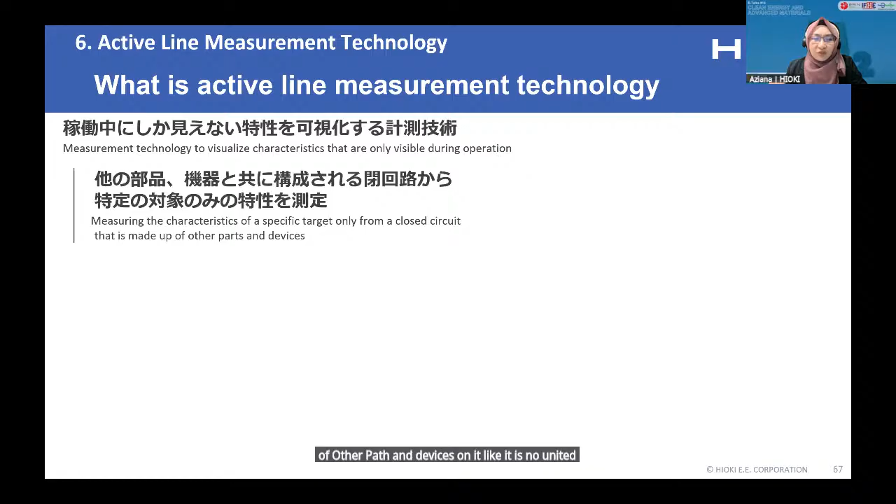We get to measure the characteristic of the specific target from the closed circuit that is made up of other parts and devices, because the electrolysis cell is not on its own. It is connected to different forms of DC power supply and so forth. So this kind of outside interference might affect the measurement.

So this is how we connect our ALDAS measurement system. It is not together with the system of the electrolysis cell. Electrolysis cell can operate on its own. Our system just attaches our clamp sensor to the wire of the active line that connects the DC power supply to the water electrolysis cell, and we measure the voltage.

We also need another cable for the source module, which is to input the AC current for the measurement. From our system, we can have the Nyquist plot or Cole-Cole plot, the impedance graph, together with the IV plot, measured and plotted simultaneously. We can also do impedance logging at a specific frequency with our measurement system.

So why do we need active line measurement? Like I mentioned before, the water electrolysis cell is not on its own. It is connected to an external DC power supply. This composite arrangement is not the characteristic of the cell itself, so the user can't tell the difference. They just measure, but then we're actually measuring the whole system, not the cell.

So that is where we go to the next part, about the current divider effect of AC measurement current, because EIS is closely related to applying AC current to the system, and this effect might also affect the measurement. The current divider effect occurs when the DUT is operated by an external DC power supply, where the AC measurement signal injection point is attached in parallel to the active line of the DUT, based on Kirchhoff's law.

So a normal conventional EIS device measures both of these. For ALDAS, we only measure independently on the DUT side.

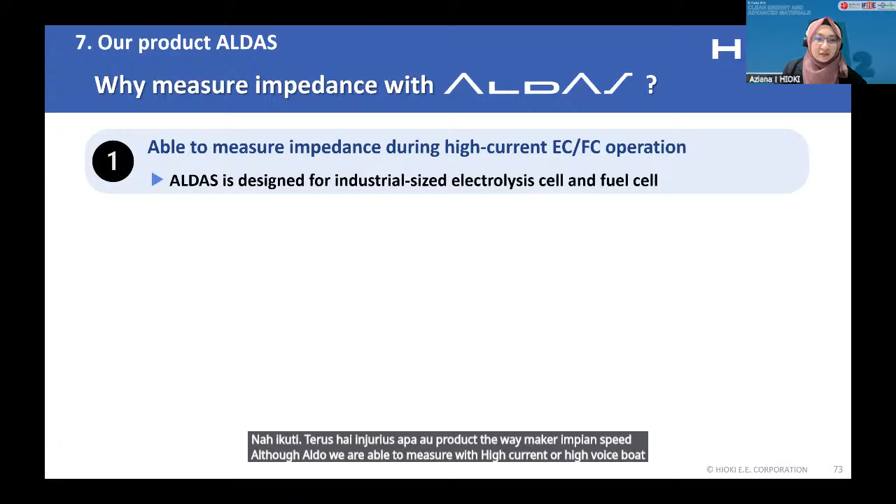Now I'm going to briefly introduce our product. So why measure impedance with ALDAS? With ALDAS, we are able to measure with high current for both EC and FC, because it is designed for industrial size electrolysis and fuel cells, due to our current sensor technology that can measure really high current, up to thousands of amperes.

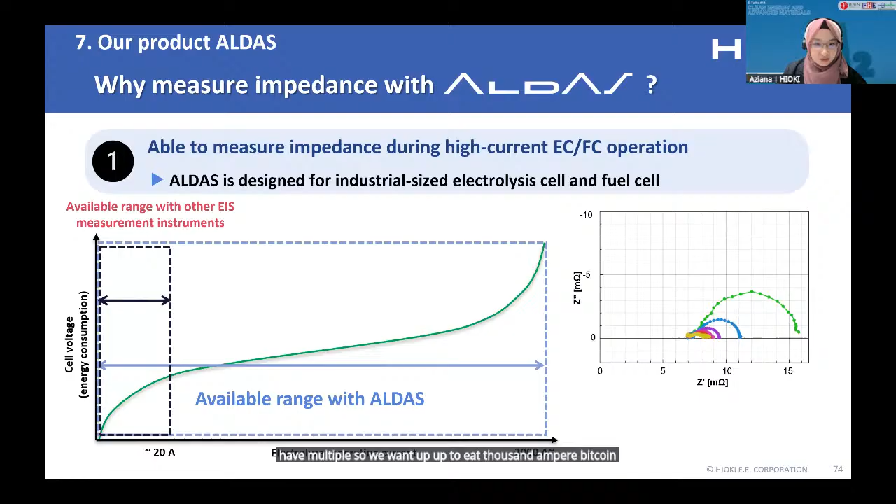No modification is needed because with our clamp sensor, you just clamp the current sensor at the wire. You don't need to modify the whole electrolysis system to fit in the EIS measurement system. Conventional methods cannot accommodate high current, so they need a very small scale, like 1 by 1 centimeter square. But with ALDAS, we can measure high current.

Hence we can just measure at size. We don't need small scale tests. We can test how big, depending of course on how big your MEA is. We have this technology to measure very high current and very big scale, not just 1 by 1 centimeter square. ALDAS also has multi-channel measurement, and it is simultaneous.

There's no delay. It is a true simultaneous measurement, multiple stack. For instance, in multiple cells in a stack, the same stack, multiple cells, we can measure it directly, up to 24 channels.